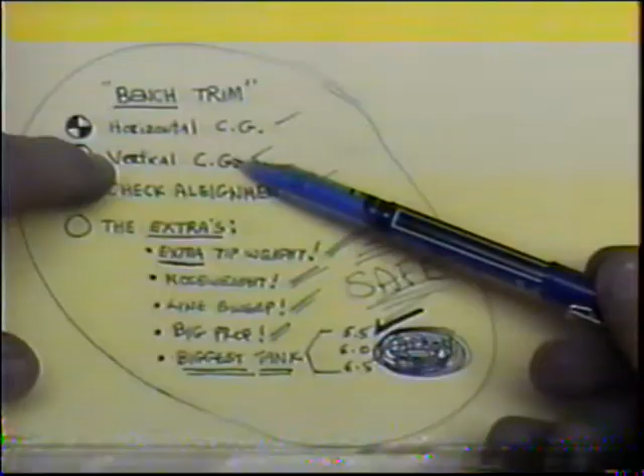Now, I've already done a preliminary vertical CG, and it looks like this plane will need a little bit lighter wheels. The wheel side is a tad heavy by about a quarter ounce or so.

And I have this laser alignment tool now. I've never used it, never even had it out of the box. I ordered it because I want to try this, because this is a take-apart plane, I can move things around and change things. And because I want to eventually put a carbon fiber wing in this plane, I want to be able to line everything back up.

But anyway, safe trim. You can do this all on a bench. And of course, this assumes once this is done, this is only step one. This involves something a little more, well, you can't really do it in the shop.

Now, in years gone by, I've done first flights on shorter lines, and basically the last 3 or 4 planes have all trimmed out with full 70 feet to the middle of the plane, the middle of the handle, solid 014 lines. I always have a set of 018 68-foot lines in case there's some pressing reason I'd want to fly in a pouring rain.

Well, to tell you the truth, over the years I've kind of abandoned that whole approach, and if it rains, I don't fly. And certainly this model, with the amount of hours I have in it, and what happened even at last year's Nats with the I-beam Spitfire, we got to the 3rd Walker flight, it was raining, and you lose your flight.

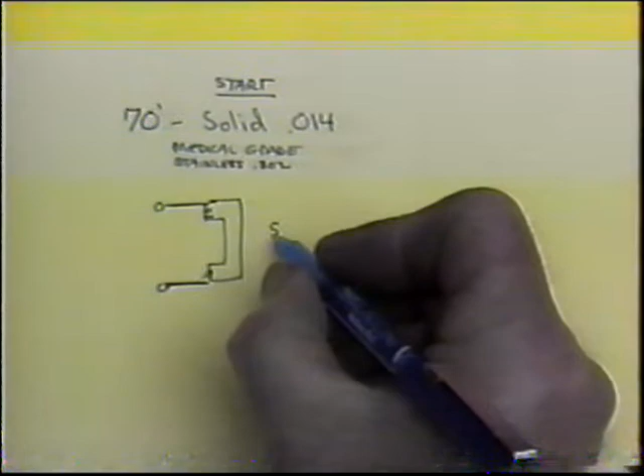And for a first flight, I would always start with the handle open as wide as it needs to be, as wide as possible. Give myself, again, this is for safety, because we know the plane is going to be nose heavy.

Now, as we take tail weight out, we can kind of come in, and see if the plane needs to turn asymmetrically or if it's symmetrical. Again, this is an infinite adjustment that might take hundreds of flights, but for the first flight, I'd like the handle opened up relatively wide.

Now, on the plans of any plane, should show you one of the most critical things, the CG. Now, the horizontal CG, 15% is about as nose heavy as anybody I know flies a plane, maybe with the exception of 1 or 2 people.

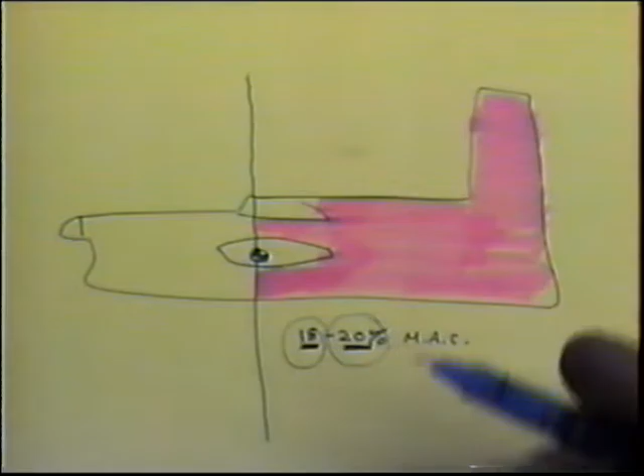And there are a few people I know, if you look at the plans of their plane, they'll show 22 or 25% rearward set CGs. Well, maybe for the super world champion flyers that's true, but most people are going to wind up in a 15 to 20% range, again, to start with, and then you need to feel it out.

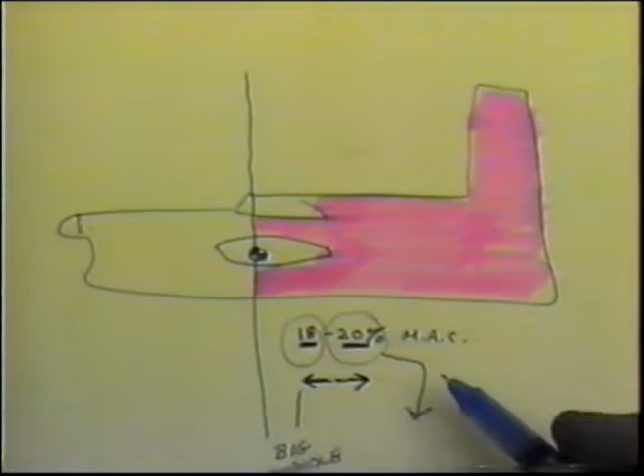Now, what happens if you have a 15% CG? You'll probably wind up with a big handle. If you have a 20% or rearward CG, or tail heavy, what's going to happen? You're going to want a small handle. Smaller.

Also, and this is good information, if you're flying a nose heavy plane, you'll probably want relatively short arms on your handle, or if you have a bar handle, you'll want the bar pulled way up against your knuckles. And I'll just exaggerate this: if you're flying a rearward CG plane, the arms can typically be longer.

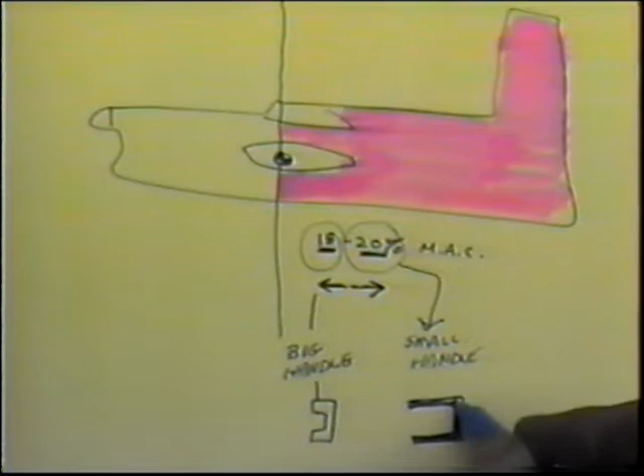So what you see here is an infinite amount of possibilities for trimming the airplane. But you need a place to start. So we'd like to start right in the middle.

And in this case, we're lucky because the plane didn't come out tremendously nose heavy or tremendously tail heavy. We don't need to resort to things, drilling holes in the motors or whatever, titanium wheels. But the horizontal part of the CG on this plane, good old 38, seemed to be real close. I think we're right at about 16 or 17%, and that's where we're going to put our first flights in.

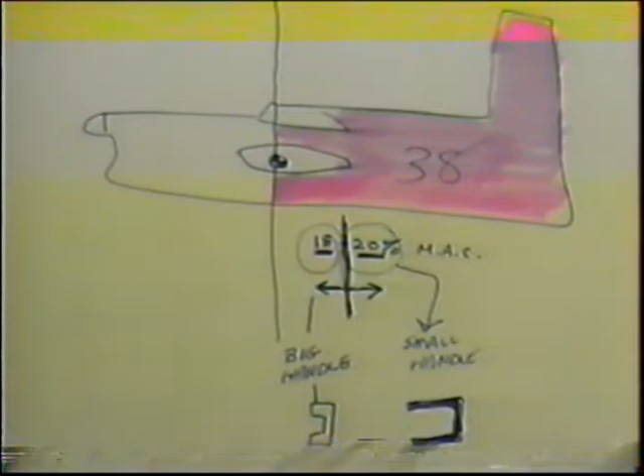Final thought here. This plane, as it sits now with the carbon body, is 55 ounces. Now, what happens as a plane gets heavier and heavier, and as you put more and more paint on it, you notice that a much larger percentage of the plane is behind the CG. So what happens is, as a plane gets heavier...

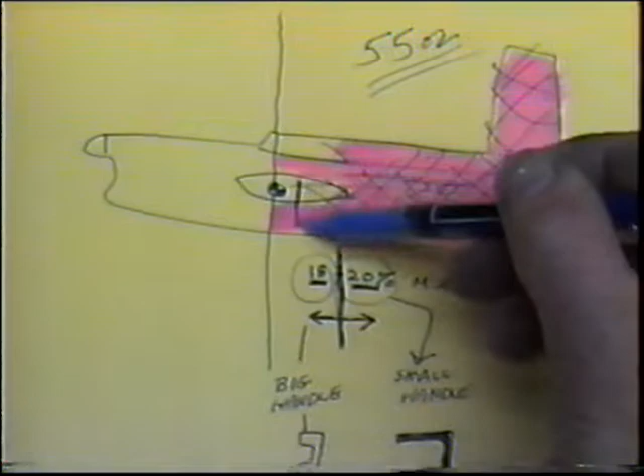I can guarantee you what would happen if this plane were 65 ounces, there would be a lot more chance the CG would be at 22%, or it would be further back, and then we'd be adding nose weight, and then we'd be in this cycle of, oh, now it's 70 ounces or whatever. So I'm kind of glad that it came out on the light side. I'm very glad that the CG wound up real close to where I wanted it to be, or where I had anticipated it should be, based on all the Cardinals and Stregas and Tsunamis that I've already flown.

Now, I did just a rough test on the vertical CG, and it looks like I have 2-inch wide wheels. It looks like what it'll probably need is a little bit smaller or lighter wheels to make it perfect, but it's certainly close. But here's the choices you have.

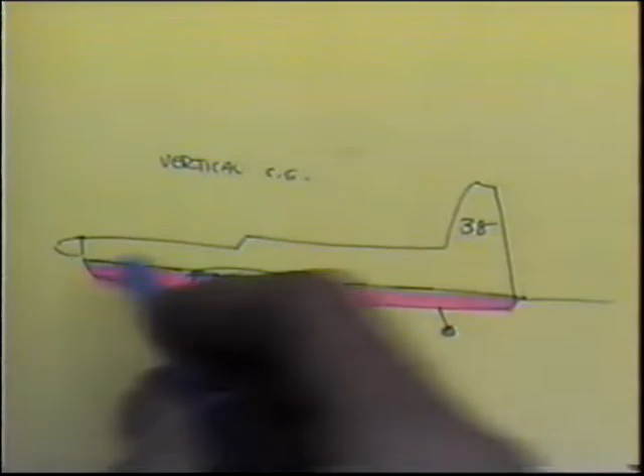If the plane doesn't work out right, exactly right, and of course that's up to how accurate you want it to be, a lot of choices you have is if you want to make the part that's light heavy. If in our case we wanted to keep these wheels, we'd probably need to add some nose weight or something up here, 1/4 of an ounce, or a heavier prop nut or something to get that to teeter-totter back.

Joe Adamuscko at one time added a fishing sinker to the tail of his Cardinal right up there to get the vertical CG in. And I feel, now some people don't feel, it's not a universal thing. Some people say, to hell with the vertical CG, just fly the plane.

Here's what happens if the vertical CG is wrong, and you live with it. Here's what typically happens in our case, let's just use our case as a thing. The wheels are a little bit heavy. So what's going to tend to happen is as this plane is flying, centrifugal force, which is a very considerable force, is going to tend to do that.

And what's going to wind up happening is I'm going to have to answer the phone. Hang on.

Back from President Nixonville. What I was trying to explain, because a lot of people miss this, they'll have a plane where the vertical CG is wrong, and because of the weight here, obviously what happens is centrifugal force at the extra weight tends to, in a very small way, maybe only 1/8 of an inch or 1/4 of an inch, but the plane will fly like that.

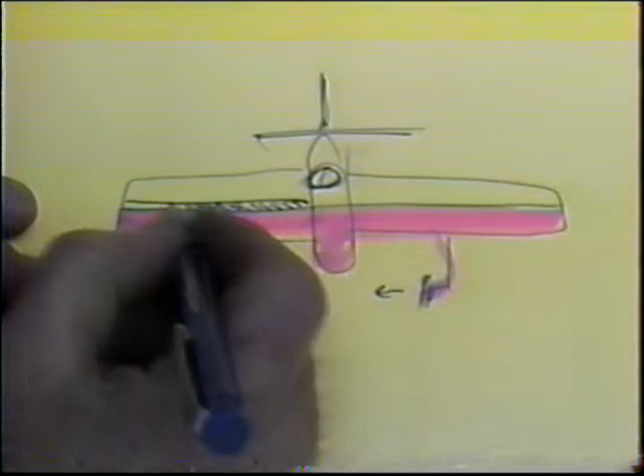So what they do then is put a flap tweak in. So now the outboard flap is up unnecessarily. The controls are not both in neutral at the same time. You've got like an asymmetrical control system just to correct what you can correct with the weight.

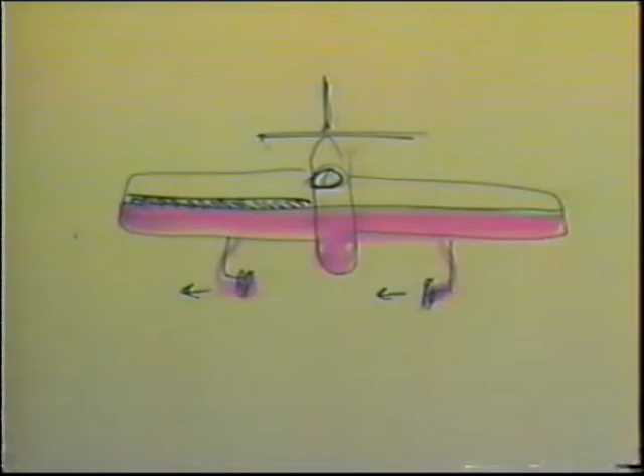So I'm kind of fussy about trying to get that part of it right before I go on to the next step. I want it to be nose heavy, tail heavy, but I don't want to start tweaking anything or adding tabs until I find out that I've got that part of it, that it's flying straight on the end of the lines. And I'm more fussy than most people are.

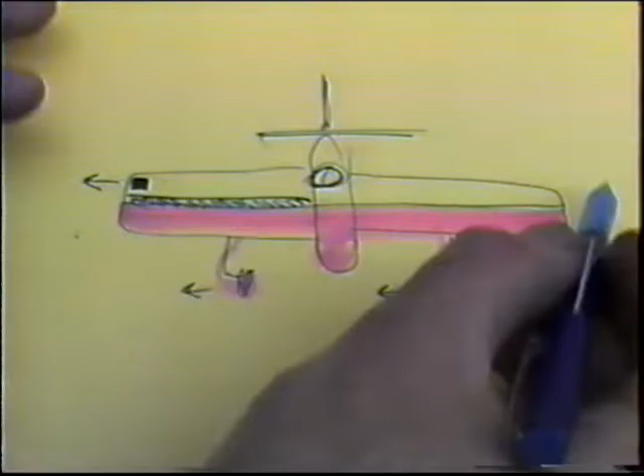One final thought too, another way of dealing with an unequal vertical CG is I've tried things like this, like moving the tip weight up in the wing tip, hollowing out the whole tip and putting a tip weight up there so that kind of counteracts it. There's a million other little tricks, but basically this is something you can do at the bench trimming phases.

Try to get it right through the center of the wing, and the way that I'm real comfortable doing that is, it's called the Plumb Bob method. You need to have perfectly calm air, no air, and you hang the plane from a wire. And here's the fuselage of the plane. Hang it from the lead outs and let it hang perfectly straight.

And what you'll see is it'll be off. In my case, it's off just a little bit because the weight is too high. Now you could put some weight here, or you can make this weight less. And the way you check that it's straight is get a thing called a Plumb Bob, which is basically just a chalk string. You can use a weight on the end, any kind of weight, it doesn't even matter. And then you sight down the Plumb Bob until you see you have it right.

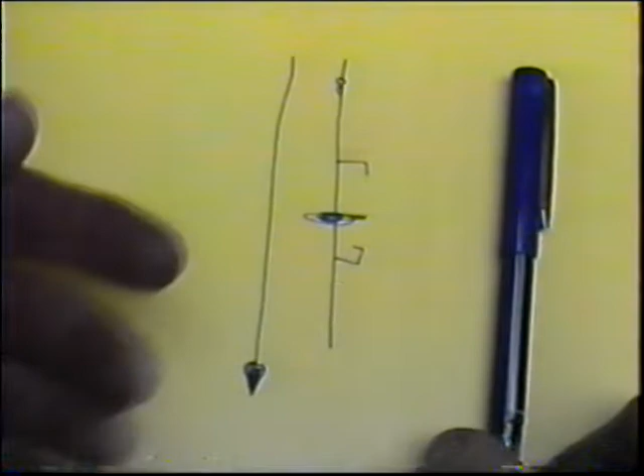It's relatively easy to do, but it's time consuming. That's why most people skip over that step, and then they wind up with unnecessary flap tweaks and things that are crazy.

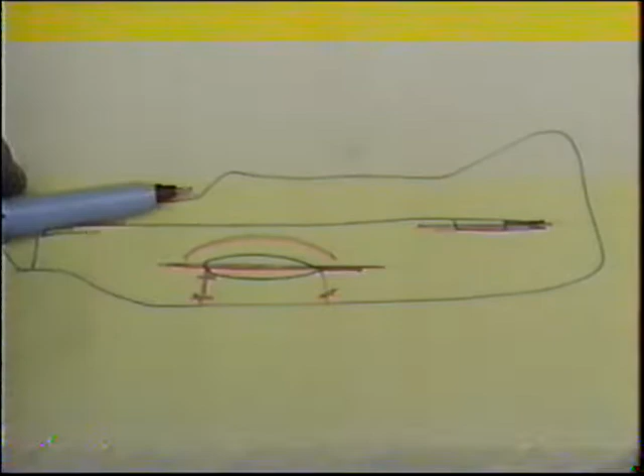Either later today or tomorrow we're going to check our laser alignment tool, but what we really want to do is ensure that this one is very difficult or impossible to adjust, because these formers on my take-apart system, that's pretty much what everybody else does. This is kind of my permanent datum that I can't really change. But I can always take the engine and slide a razor blade in on one side or the other, if I really had to, if that was out.

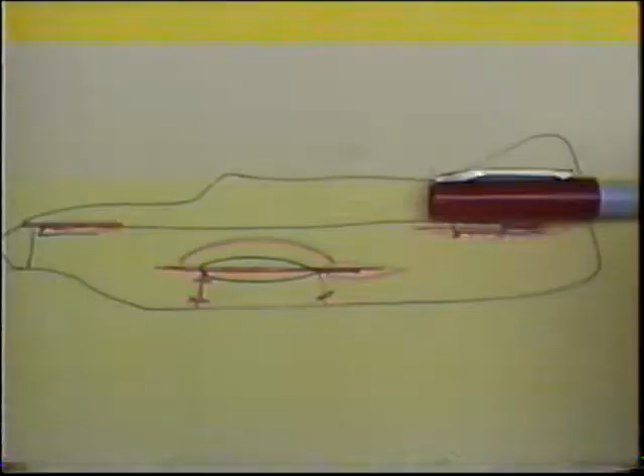And the tail, of course, because it goes in with compression bolts, I can always put a little shim in the front, a shim in the back, if it turns out the tail is off one way or the other. But most likely, the scenario that really almost everybody benefits from is if a plane doesn't turn equally, to make sure the flaps and elevators are both in neutral at exactly the same time. A lot of time you'll notice this will just be down 1 degree, this will be up 1 degree. Being able to adjust that push rod length so everything is in neutral at the same time.

And once all of these little things are taken care of, we're ready to fly the plane.

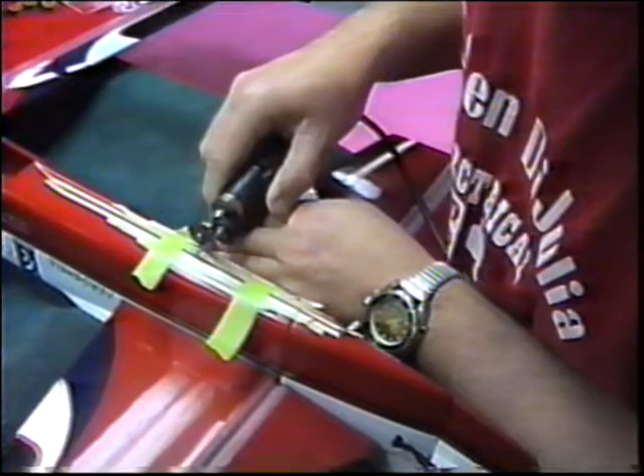At least the carbon fiber does cut relatively clean. Now notice you always take a climbing cut. I call it a climbing cut, I'm going from my right to my left. If you're trying to go this way, the tool catches and it just knocks you right off the part. All right, now what I'm going to do is take the tape off, clean that up, and see how the doors are going to fit in that slot.

Oops, show you how to knock the camera over. Let me show you a neat little trick.

When you cut a slotted part to fit in, one of the best tricks is to cut the slot a little bit shorter than you need to, then cut back the edges. If you make the slot longer than it has to be, look at my finger, you'll see the end of the slot. This is an old trick from laying tile. You always cut this edge back, cut the corner off, and that piece at the corner tends to lay on top so you don't see the slot.

Looks like we've got it because we're lucky today. So I just need to cut that back just a slight bit - that little bit will disguise the end of the joint.

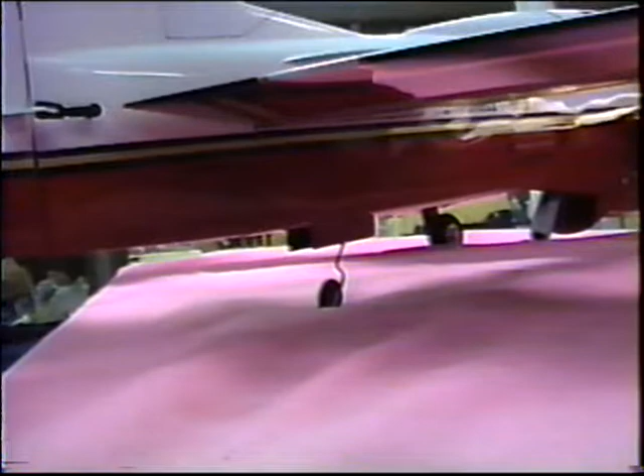We're waiting out the time to do a final trim on this. I set up my little bench to do some calculations and realized this plane is relatively nose heavy, which is the best of all worlds. I wanted to see how much solder it would take. Obviously I want it at 15%, and I don't want to fly it if it's more than 15% nose heavy. So I have that figured out, and that was the first step.

The other thing I wanted to do is I have a lighter spinner. These are the Russian ones they don't make anymore. Some of the hardware I've been fitting up here - I fit the other engine in to make sure everything lines up, because there's two different needle valve holes and things like that, and the headers may be a little bit different every once in a while. I made up a spare pipe, and the outlet on this looks real cool. I don't know if we're going to keep this as a spare or use it as the primary pipe, but it exits right out over the back. You can see what that'll look like when the bottom is on.

Also, in the course of fooling around with this and waxing it, I realized a couple of little things that I really want to upgrade before we actually go out to the flying field.

If I had not checked and seen how nose heavy this was, it'd be a very disappointing first day. You get down to Middlesex, everybody's down there, and what happens is you lose a day. Flying days are so few and far between that I don't want to lose any of them. But at least the best of all worlds is if you don't need any weight. It looks like we're going to have a little bit of a nose heavy condition.

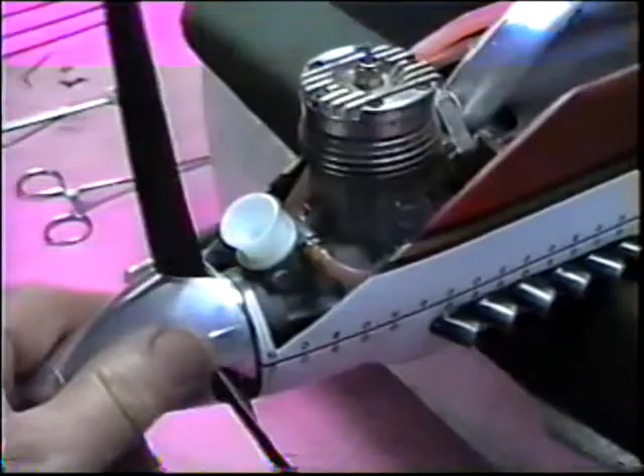Now the choices are I can try to make up an even lighter spinner than this. This is considerably lighter than an aero spinner. Again, they don't make them anymore, as is always the case.

What I plan to do is pick up some fresh clay - my clay looks like it's 1,000 years old. When we actually do get to fly the plane, I'll know I need this much solder to get it balanced. But I can adjust the solder when I'm done, or fine-tuning it, or if I want it to corner harder or whatever.

When I have it exactly the way I want it, the choices are obvious. I don't even have to make one - I have a brass tail wheel. Depending on the vertical CG, I can pack the tail cone with clay and just leave it there. I can weigh out this much clay and push it in with a little stick. What's nice about the clay is if some of it comes loose, it won't clog up the controls. A piece of lead would be a problem - it would clog up the control or possibly be a problem.

But anyway, as we go down the final home stretch here, I already gave up on the tape - it doesn't stick worth even 10 minutes. But I just wanted to have it in inventory. I wanted to see possibly if it did work. You never really know.

Anyway, knowing that it's real nose heavy is a big relief, because it's a lot easier in my feeling. If it's nose heavy, the things you have to do are all real positive - lighten up the spinner, lighten up any other hardware, and I still don't have the tank from Joe Adamuscko, the real fuel tank that's going to go in there. Those things seem easy to deal with. When you have a plane that's real tail heavy and you start loading up 2 ounces of weight on the nose, or an ounce, its gyroscopic action is always a problem.

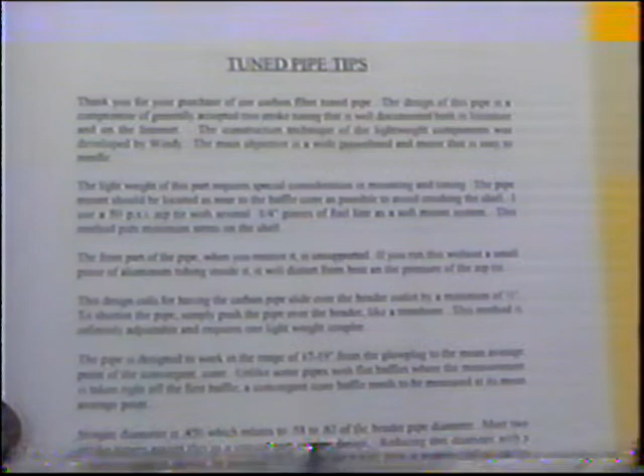If you're already one of the people that's bought one of my tuned pipes, you'll know I do a very vigorous testing program. I want to share with you the information I've learned over the years, going back to when we started making pipes in the late 80s with the help of Dave Midgley, who did a lot of the molding. At that time, he had an oven and I didn't. What I've learned since then, a lot of things have improved and gotten better, and I'd like to go through this quickly so you have an understanding of where our pipe program is going.

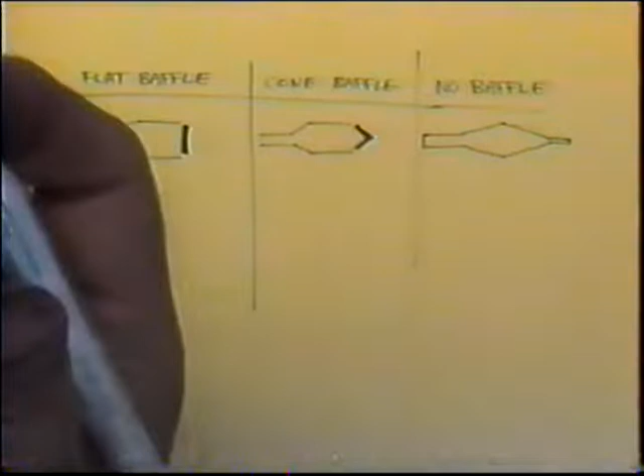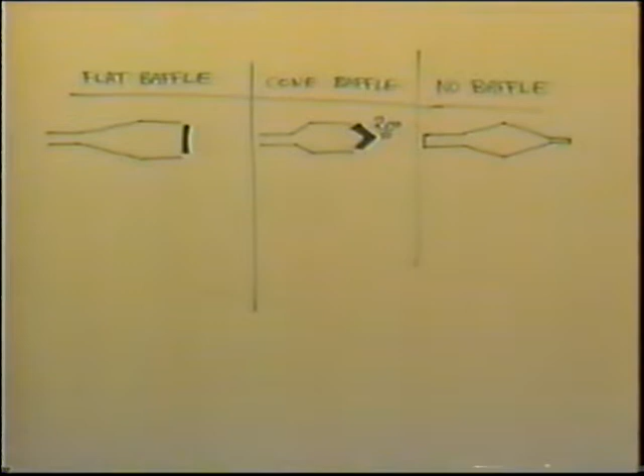We were able to get something like this, a much wider, friendlier needle range. Now, of course, a speed pipe or a no-baffle pipe are the other major ways they make pipes. A speed pipe would have a power peak like this.

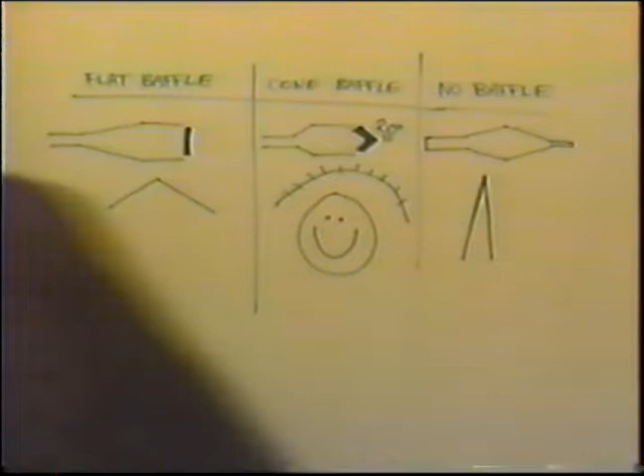One of the things we've done over the years, trying different angles and different things, is we've settled on the fact that we like a cone baffle pipe for the way we like to run motors. Please don't confuse this with a put-down of somebody else's system. A lot of people have been very successful with flat baffle pipes—it's the same way some people like Foxes and some people like OS Maxes. It's just a different way to run it.

I like to run my motors with the cone baffle because I seem to get a much more defined motor break. I've developed this over the years with several molds and Teflon molds into a system I want to use in Miss Ashley. This is my system, evolved over about a 15-year period, which seems to work well for me.

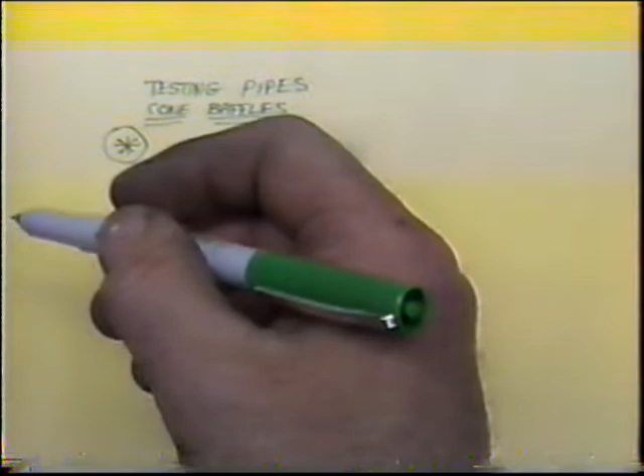There's obviously a lot of other systems. One is you can buy a motor and a pipe, basically a $500 or $600 investment, put it in a plane and go fly. I have a much different system. What I like to do when I get a motor—I've gotten excellent results with George's GMA Jet 60, obviously the PAs, the double stars, all the modern motors are good quality. It's not a comparison of motors, because you basically set up a motor the way you put on a shoe, how you like it. Some people like tremendous peak power, some people like a nice fat range, same as props. Some people want low pitch props where they run the motor hard, some people like 4 or 5 pitch where the motor runs softer and quieter.

But if you follow this, I think it will help out. One of the things when I start making up pipes—I'm going to start a production run in the next couple of days. Of that run, I want to make, at the same time, a couple of spare pipes for Miss Ashley so I can test them. I'll show you the little thing I want to try. I'm going to start by assuming all of the pipes are going to have cone baffles.

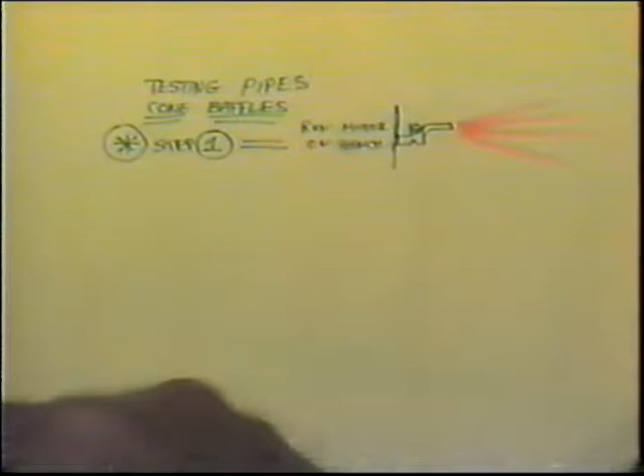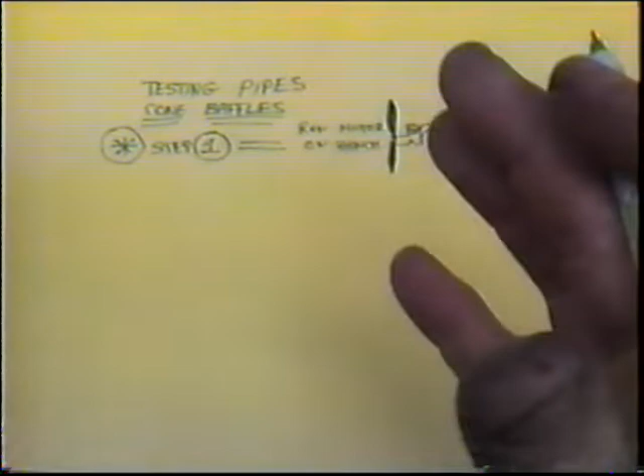One thing I'm going to do is put the motor and the header on the bench with no exhaust system, and I'll use the prop that I want to use in the plane. In this case it's George's 3-blade square one. The prop will stay constant for the whole test, and so will the fuel. Prop and fuel have to stay the same if you want a relatively valid test.

The first thing I do is record a reading for maximum RPM. This is a very crude way to do it, but it works every time. Let's say the crude reading here is 10,500 RPM, which is probably typical with a 3-blade carbon prop.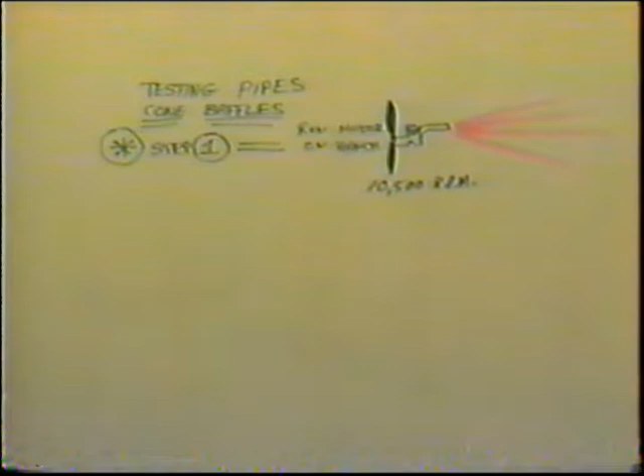Now the next step is I bolt on the exhaust system, and this part up here will be variable. I can insert little pieces in, and I'll start by running the pipe at 17 inches, 17 and a half, 18, 18 and a half, and 19. These are just typical numbers. For what I've found and the RPM I'm comfortable running, these five settings will give me a little power curve.

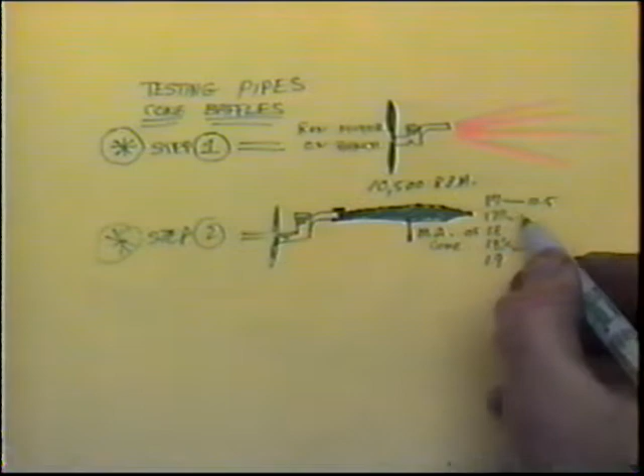Somewhere in here there'll be a spike. I'm just making numbers up, but typically right here you'll get 10.5, here 10.6, here 10.7, then 10.6, and 10.5. Just to make a little analogy: right here is the power spike, and right here is where maximum power is.

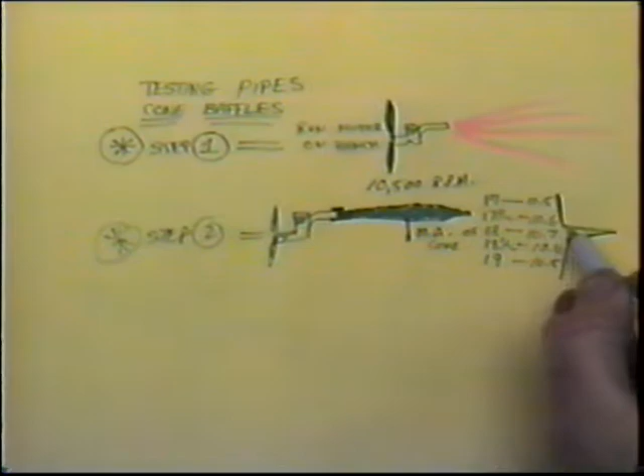So knowing that, I want to zero in on it, and remember we're measuring the mean average point of the cone baffle - you measure the mean average point, not all the way to the point. Typically, with the pipes I've made for other people and myself, 18 inches is a good starting point.

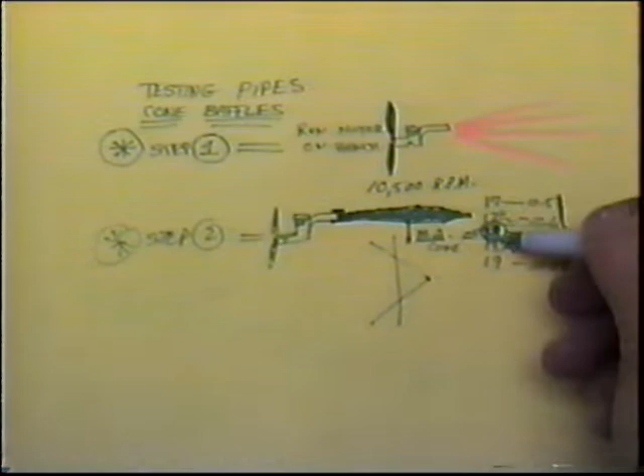A little shorter will give you more power. A little longer, if you can keep it running on the pipe, it'll run friendlier and friendlier, more like a typical 2/4 stroke run. Up here it starts getting more and more like a speed ship. But this is a good way I've found to establish this right on the bench, without even having the motor in the plane.

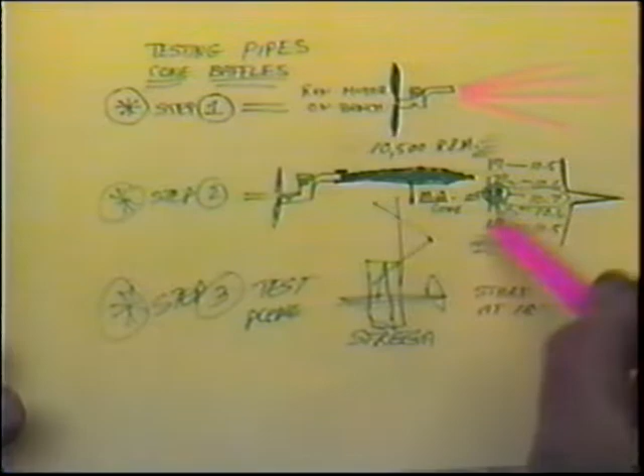The last part of this, before we're ready to go, is I'll take old Strega off the wall and put in the pipe that's already set where I think the power spike is. And remember, on hotter days the pipe tends to get longer, on cooler days it tends to get shorter. It's a sound wave in a high density volume - the cooler the air, the shorter the pipe; the warmer the air, the longer the pipe.

So if you're in Canada, obviously Ken Clapson's going to be running some short pipes. Guys in Brazil are going to be running long pipes. We wind up somewhere in the middle of that.

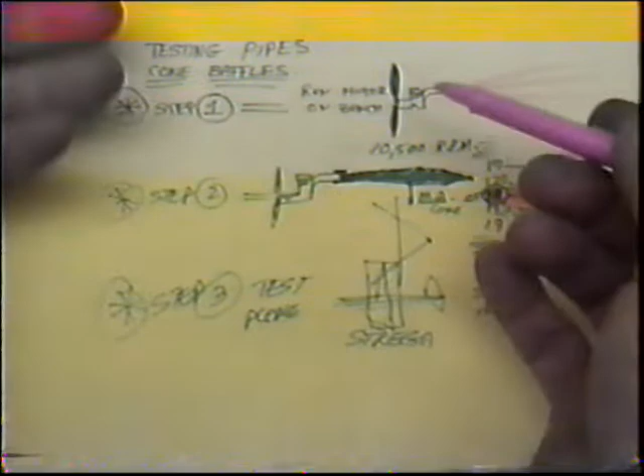But now you see what's happened is I've spent probably an hour, hour and a half, a gallon of fuel, and I don't even have the motor in the plane yet. Now it's going to go in a test plane - in this case, it's Strega, our old test bed plane. And what happens here is I want to see if I'm real close.

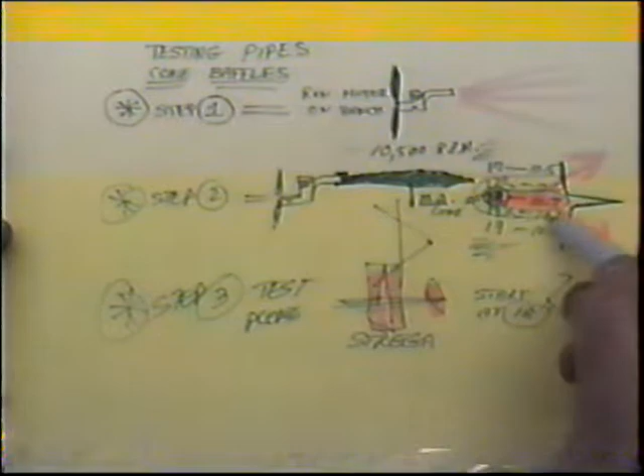So on the first flight, when I put a motor in for testing or a new pipe, I'll start at 18, move it out to 18 and a half, move it down to 17 and a half, because I know that's about where I'll be at maximum power. The power range I've found usable is about an inch. You get much longer than that power spike of an inch, and power really kind of drops off. Or on the other end, you've just turned your motor into a speed motor where it's only going to get on the pipe at 12,000 RPM or something crazy like that.

So by doing this, notice the thing that's significant here is we haven't even got the motor into a plane yet that we're going to be flying in competition with.

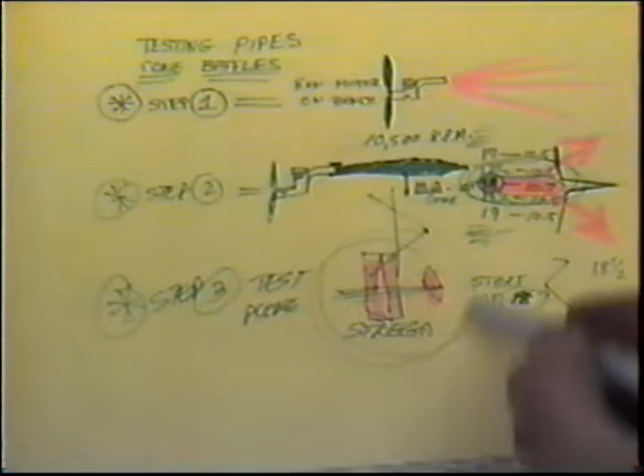In this case, when we're real happy with everything that's going to happen in Strega, we're going to try to get out this weekend with Strega and do motor testing, even in this rainy, crappy weather we've been having. The idea being when we take this, and this is step 4, and this is my plan. This works very well for me.

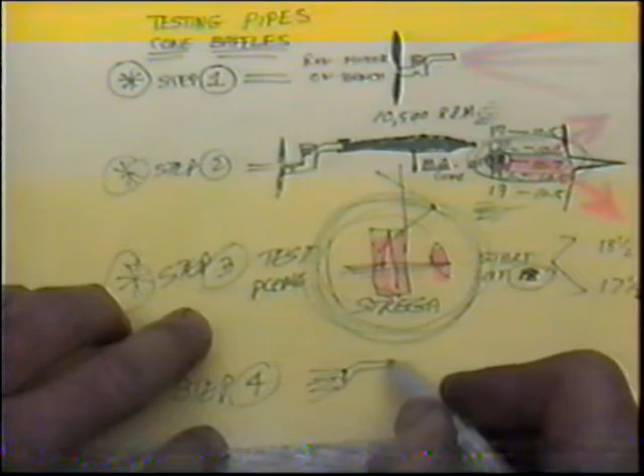Take that motor with the header all attached, the rubber coupler, the pipe set where I think it should be to whatever stinger set situation is, and the prop. That whole thing can just get bolted into the plane as one unit.

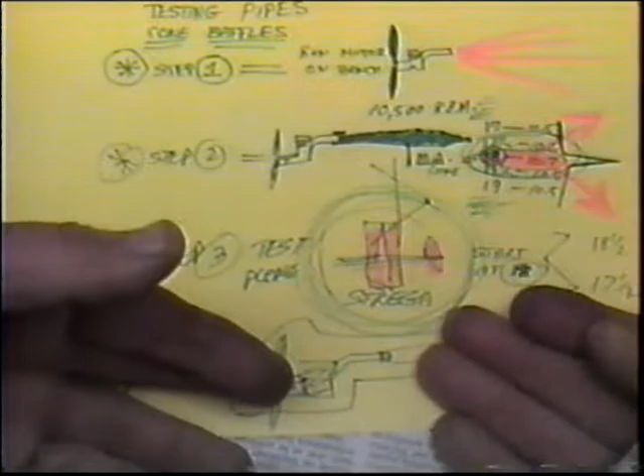What I hope to do is eventually have not only a pre-tested motor pipe where all the dirty work is done in a test plane, that I can bolt this whole assembly into Miss Ashley and be relatively close, so on that very critical first flight I don't wind up with crazy things, like couplers being loose or whatever. I really feel this 4-step program has worked very reliably for me, and you can use this to your advantage.

There's nothing here that you need to be a rocket scientist to do. And if you're just starting out with pipes, like I know many people are, this information I think will serve you well.

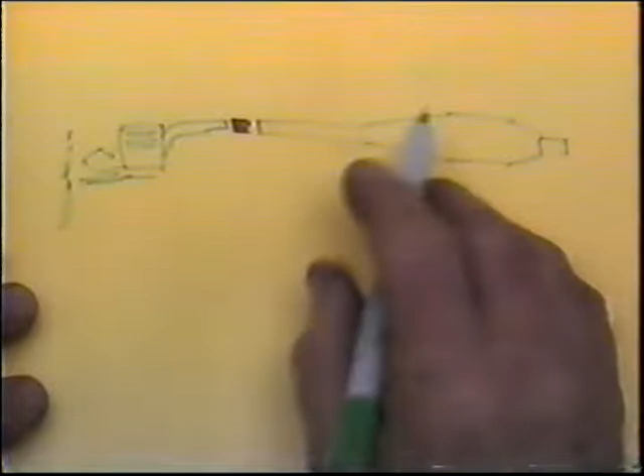One of the other things I wanted to do—over the years when I've tested pipes, I've wound up cutting them shorter than they have to be, and what you need then, of course, is 2 rubber couplers. The couplers weigh a lot. They add an element of uncertainty because you need more zip ties, and there's significantly more vibration.

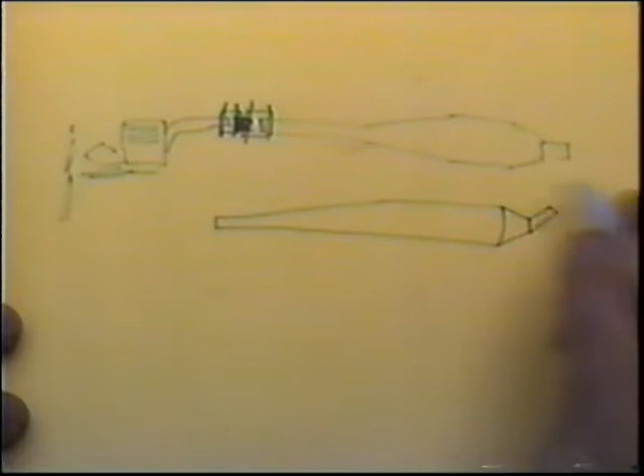So what I've tried to do now is come up with numbers, because I've done this so many times. I've come up with numbers that on the pipes that I make from the mandrels I use, I have a real good idea. I can use a cone baffle in the back, point the stinger up, and I'm going to go over this in a second to lay some information that I've learned on you.

What I do is make up one pipe where the baffle will be relatively at—let's just make a number up—at 18. Then I'll make another pipe where the baffle is a little bit closer in, maybe a half inch, and another pipe where it's out here. So one will be 18 and a half, let's say, one will be 17 and a half.

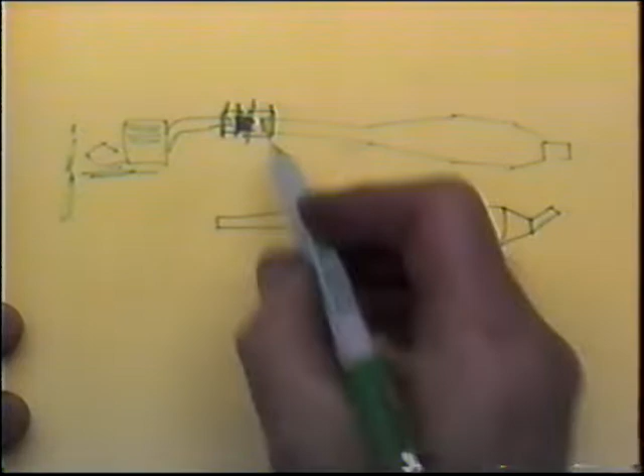Now what happens here is I don't need this—I can change the pipe itself as long as everything else is constant, and since these are made from molds, the pipes are not that much different. What happens is when I want to change the pipe length, I just change the whole pipe to a shorter or longer pipe, and I can make the pipe 2 different ways.

You can put the baffle—because this is a constant belly section for quite a while—I can move the baffle inside the pipe, and that keeps the stinger in the same spot. Or I can just shorten this piece, and remember, I would never get it shorter than where that aluminum tube is.

That aluminum tube—in other words, the 2 situations are some of the pipes that we've made that slide over the header like a trombone. What you have to be real careful of is that when you put the clamp on, the clamp is not here. The clamp is over aluminum at all times.

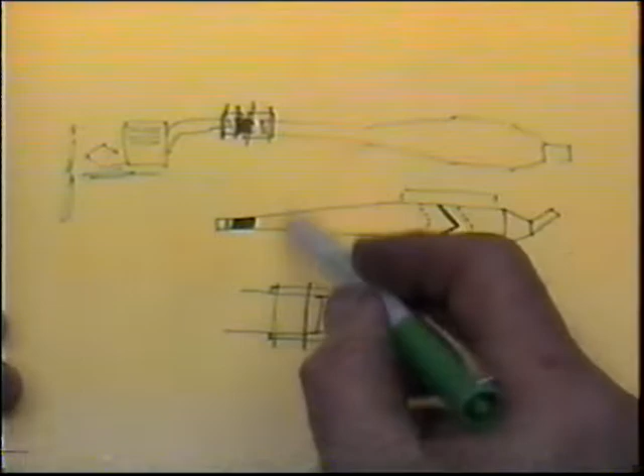Or that the little piece of aluminum stays in the pipe to keep the zip tie from compressing, because when the resin gets hot—and this is the hottest part of the pipe—you don't squeeze the pipe.

On a tuned pipe, there's 2 distinct things happening. There's a part of the pipe that sonically is going to reflect a wave, and it's this part of the pipe right up to the mean average point of the baffle, or in the case of a flat baffle, it would be at the face of the baffle. This is the part of the pipe that works, and everything that happens in here is doing something significant that you want to take advantage of, the pluses and minuses of having this tuning ability.

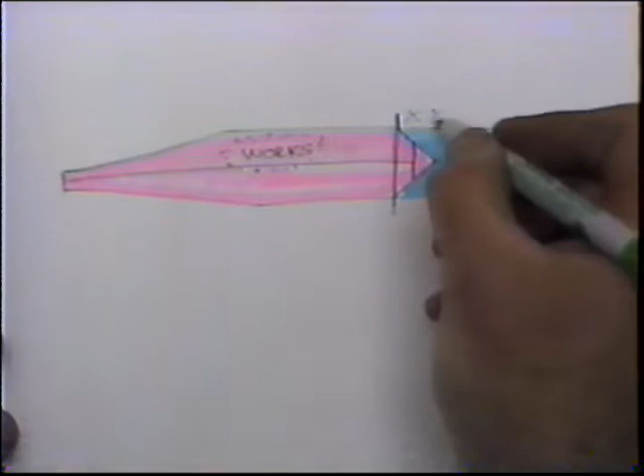Everything that happens back here, the muffling part of the pipe, relative to the front part, is insignificant. Back here, if you were to locate the stinger in the center, like a Brian Eather pipe is, which works fine, the thing I don't like about that is you wind up with this rubber, which to me, anytime I've tested them, seems to add an element of restriction, and unnecessary.

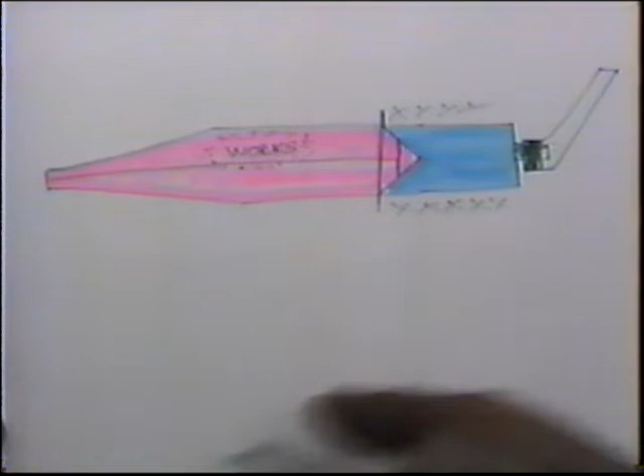It does quiet it down and it does keep oil off the plane, but I've found a better way for me, and I believe Billy Werwage's pipes now come this way, that the stinger is made out of carbon and it's built right into the pipe.

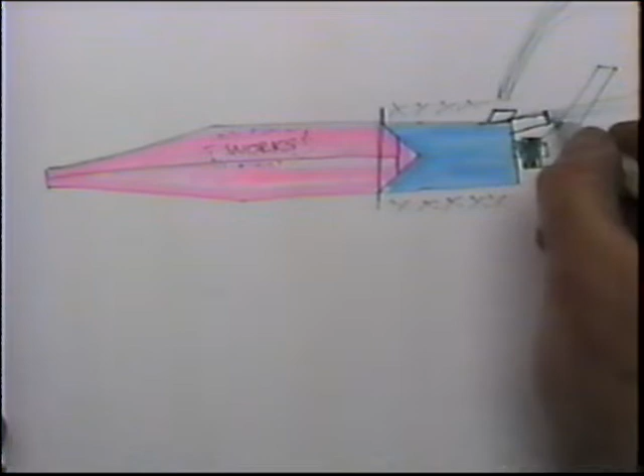Now, when it's put on a relatively flat angle like this, what I found is the smoke trail starts to look like a steam engine, and I don't like that look. So what I've done on the latest couple of pipes that I've made, I've put this on a very shallow angle, maybe a 5-degree angle, out the back, out the top, so that this is not acting like a rooster. Imagine a rooster tail. This is a significant negative thing.

When you're flying the plane and that oil stream is coming out, especially on inside squares, it always looks like the plane is putting a little wiggle in there. By having the stinger angle back - and remember, it's very easy to make these changes before you run a pipe and it's not oil soaked. It's not impossible after, but it's a lot better to decide where you want it, if you're going to order a custom pipe like the helicopter guys do, and they want that in a certain spot. Before you run the pipe, you want to put that exactly where you want it.

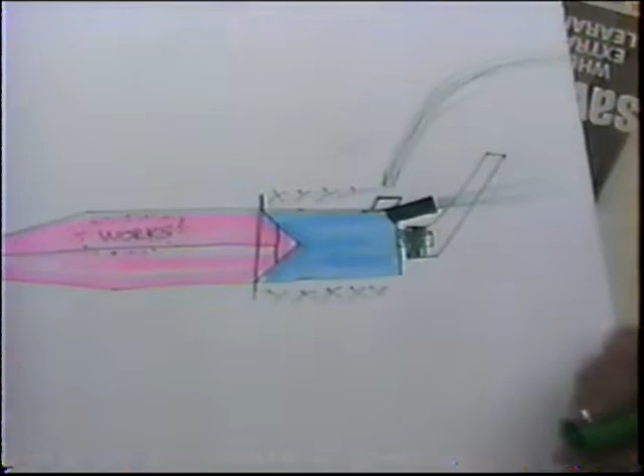And that's one of the things I'm going to be doing, is I'm going to be making, in the next couple of days, some spare pipes.

Another part of pipe technology: one pipe is useless. If it seems like any of these pipe-related things, when you only have one, you're on a hair trigger. I've seen pipes that have developed leaks, pinholes, cracks, physically broken. Up here they melt from lean runs typically. Hose clamps that distort the whole thing because they're put on incorrectly.

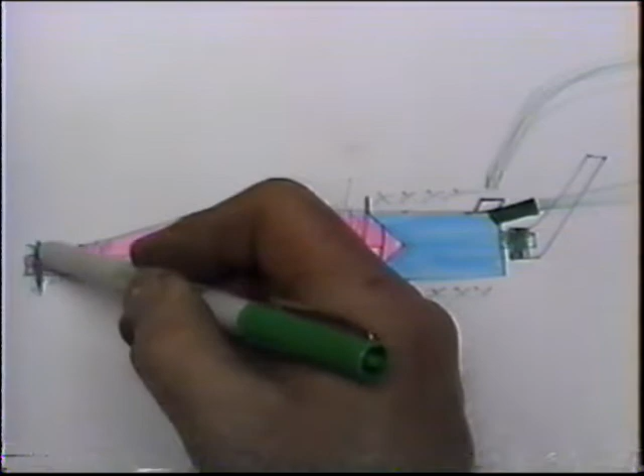A tune pipe is something like a tire on a car. You really should have at least one spare, and I'd be comfortable if I had a lot more than one spare in the case of Miss Ashley.

Not everybody wants to make their own tune pipes, and I just thought I'd put a minute or two of how we actually go about making them. They're made - this is a solid TFE Teflon mandrel. It has a very slight curve in it so it can go over the curve of the wing. It's solid Teflon, so you need no release agent.

Now what happens is, you take a carbon fiber sock, basically coat this with resin. It's high temperature resin, special resin. And this gets laid up, and we create, from this, we create the shell of the tune pipe. That's step one, and that takes one cycle to get the shell.

Now once that cures, that gets removed from the mandrel, and you can see we have a very light, extremely light, feather light shell. But because it's relatively thin and compressed, there's a good chance that somewhere in here there's - in fact, see the little pinholes in there? So this does need another coat of resin.

Now the way I make these, I sand this whole thing down with 80 grit. You can't just put resin on top of cured resin. It has to be like this before you put the second coat on. And that you can do in a lathe, or you can just sit and sand it by hand. What I found works real well is to wet sand it. Never dry sand carbon unless you're using a mask.

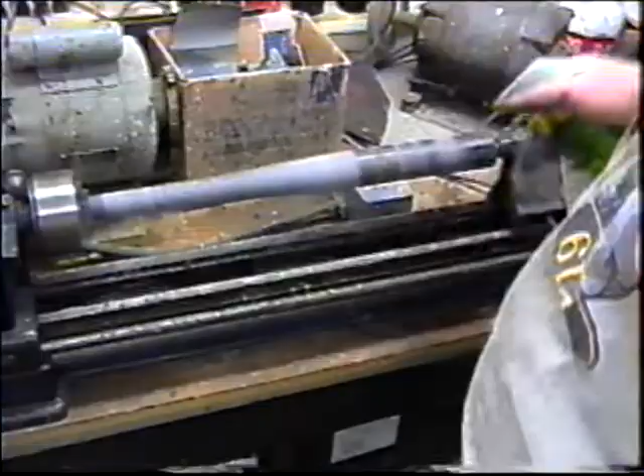Anyway, I found that by doing it this way, it's a lot of extra work as opposed to a lot of people that make pipes who prefer to just put the resin on all at once and just let it look like an alligator's rear end.

Well, part of the thing I like about these is everybody that looks at them first notices that they're lighter. You don't have to be a rocket scientist to figure out all those pebbles are just adding weight. This is time consuming, a little tough on your hands, a little tough on the wall.

At the end of polishing a bunch of these up, I have about a 20-minute cleanup operation. Now what I do, as soon as I'm done with that step, I go down to the sanding sponge, the next softer grit. This starts to really cook it, you can actually smell it burning in. If you don't roughen it up between coats, chunks of it start chunking out. There we go, now we're starting to burn it in.

But anyway, at least by seeing this, you have some appreciation of what goes into a tuned pipe. No matter who makes it, it's always a high labor item. It's not the kind of thing that's extremely easy to make. Like a motor, there's a lot of hand labor involved.

There comes the polish now. You can see the smoke. These pipes get so hot that when you're doing this operation, my hand is starting—look at it, you can see this starting to smoke too.

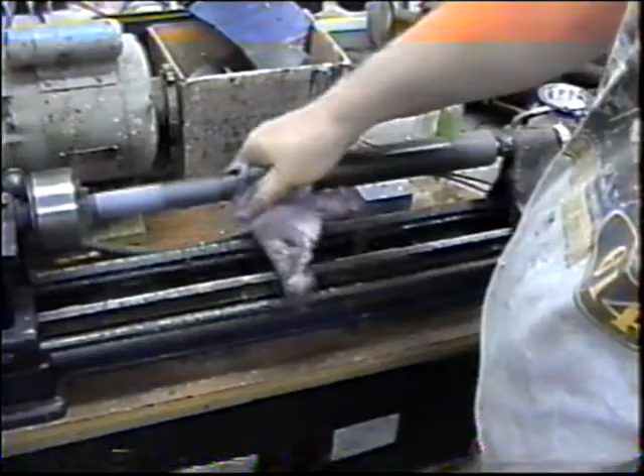And the last thing is, of course, the gorums, and you can see how quickly the gorums brings it up. Now, I went and bought, like a fool, this $30 tub of fiberglass polish. You know what? It doesn't work as good as gorums. Nothing works as good as gorums.

And when a customer gets a pipe, it doesn't matter—I just like it to look like it's a part of the B-2 bomber, or part of Tsunami or something. You can see how that polish turns out.

Now you see this doesn't ride in the chuck because this pipe purposely has a little bend here so it can go around the wing. If you use an aluminum mandrel, that's almost impossible to duplicate. But so far we've had real good luck with these—I haven't had any of them come back.

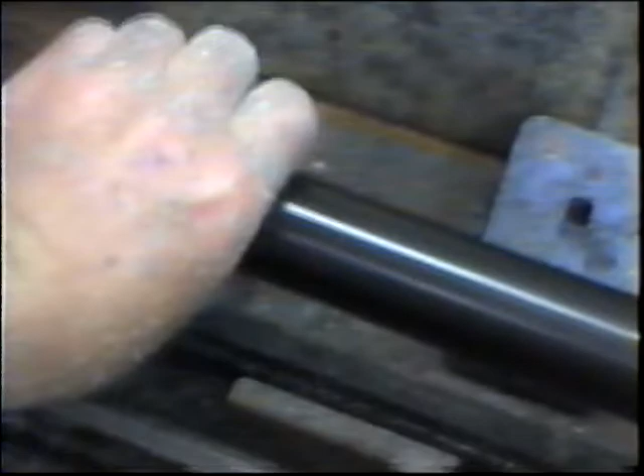On today's mail, we've got some nice stuff here. This came from Joe Adamusco, and you can see he made it to the specs I sent him, because I wanted that tank angled in the plane—that was one of my motives. This is just a little bit different, like a nobler tank. I know George had good luck with these tanks with Fox 35s. I haven't had one in a long time, but Joe makes them this way all the time.

This has a baffle in it with 8 3/32, 1/8 inch holes. He's got the vents in a little bit different position. Now what I want to do, because I have the plane all apart in pieces, I want to check that this is going to be reasonable to change at the field.

Because what I want to have, obviously, is choices. I want to get Wayne to make me up, if possible, a carbon fiber tank. But in the meantime, I want to have a normal replacement, ordinary 1-inch tank. This kind of special tank is 6.5 ounces, in case I want to test higher nitro contents or more compression. Needless to say, I want to have choices—that's the whole thing here. And that's a real work of art, by the way.

Just look at some of the workmanship on this, this is Joe Adamusco's handwork, the seaming. Absolutely beautiful. Joe, I thank you very much.

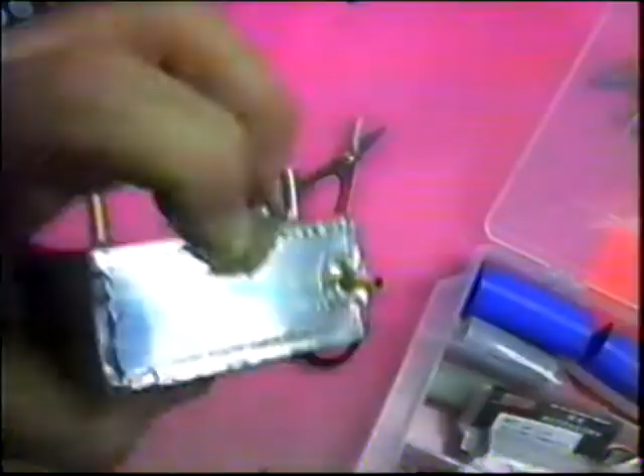The only really realistic way I know of to do this is to bend all the tabs down and solder one side first. I don't know whether this is going to be good information. You really never get all of the tabs down in the same, at least I don't.

I'll solder this first side first, even just tack it, because once this is in place, then I can come back and do the other side.

A lot of times with a tuned pipe plane, you want to wind up with a bigger tank, and that header always seems to be in the way.

First piece just tacked in. Now I can get these corners relatively nice. And then most of all, I'll go check it in the plane.

I've done this before where I forgot to take into account the header size. Really isn't good for your ego.

Now if that fits the way I want it to, then I can run the seam.

Even that's a little too close for comfort because this is real hot, so I'm going to take that out, make another piece, open this up just a little bit more. This is why I have to, and of course it doesn't take into account when you shim the tank up, it runs into the header even more. So good thing I got this done before we get to the field and this header melts the gas tank.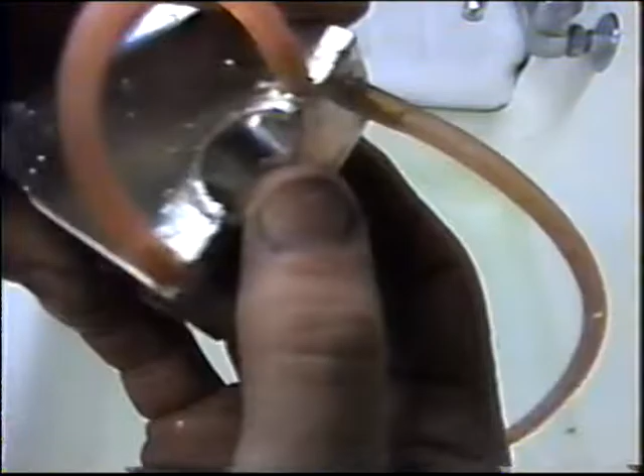Beautiful soldering job, and I mean, I think Warren Walker would even be impressed with that. Believe me, that's not as easy to do as... why am I saying that?

Anyway, what I want to do is check for any air bubbles. A lot of times when you touch a soldering iron to the tank, it'll leak someplace else.

That looks good. Probably for the first time in my life, it isn't leaking so bad. Anyway, I will clean this up.

Now the next step is I have to go get a gallon of alcohol, and I'll run a gallon of alcohol through this. The alcohol hopefully will get some of the stuff cleaned out. I have ordinary alcohol. And then I'll run some fuel through it and just watch the fuel coming out in a piece of clean paper to see if we've got it all clean, because boy, I do not want to have a first flight lean run off the end of the planet.

If there's one thing that really makes me crazy, and I know it happens to everybody, you have a plane, you wait for that first beautiful day of the year. What I want to do, before I go any further, this is my little technique. It usually works pretty well, but certainly for the first 100 flights we'll have a filter. Then after 100 flights I like to bypass the filter. But by then, you hope, if there's still stuff in the tank, you're dead.

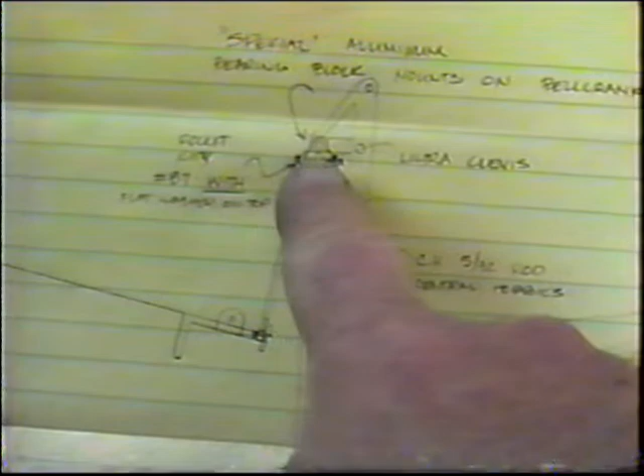Now in today's mail, this is from John Grigsby. He's responding to the thought I had about using 3 push rods, and you can see his diagram here. He had a great idea for a little clevis arm with a ball link on each end and a clevis in the middle. He made up the specifications for it. This is one of the things Gerald Champ was real concerned with when he was getting to the point in his Mustang that he had to come up with a solution for this problem.

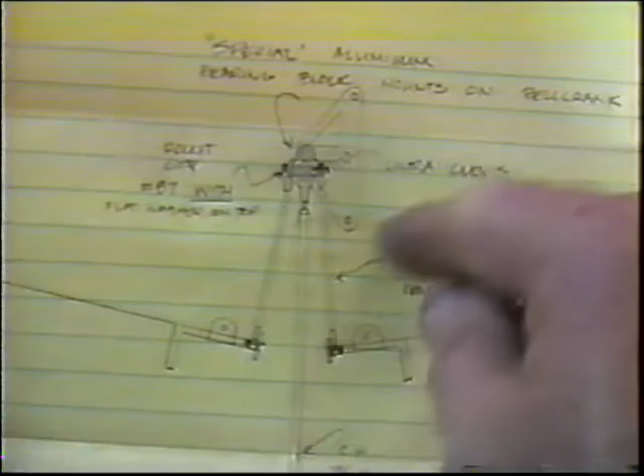And I'm not satisfied that I even have a solution. My idea was to use 3 bell cranks, but this certainly looks like it would be a doable solution too.

John sent these pictures of Jake Moon, and the caption he wrote for the photo is, "Windy, watch out, you're in big trouble. I have nicer knees than you." And his caption on this one is, "Windy, are you sure you have a tuned pipe that'll fit this plane?" What the heck. Oh, I don't know - the caption on this plane is it's too big for him to fly by himself. I don't know, he's going to get bigger. The plane won't get bigger, but he will.

Yeah, listen dummy, you want to figure out how to have dihedral in your wing? Don't worry Windy, we'll figure it out for you.

And the caption on this one is, "This is Steve Moon's B-25. This is his first one." Now imagine, he's built another one. Anyway, one of the things I always liked the idea of - maybe you could make a full-size Mitchell Stunner look like the ballerina in flight.

Steve Moon's X-35 at VSC. John, by the way, is successfully making those great carbon fiber wheel pants. Anybody wants a set of carbon fiber - now they're not fiberglass - wheel pants, contact John. He's in Texas.

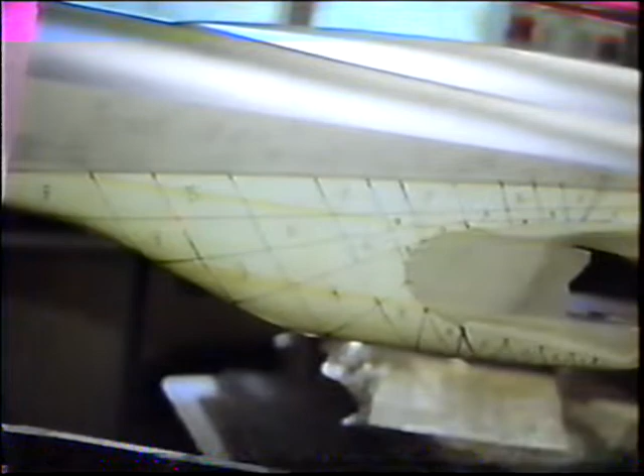Here he goes into the paint job. Look how he marked black, white, black, white. Come on, Paul, just do it. No, I can't tell by the pictures. Well, he's determined to make a voodoo paint job using Brodak purple. Oh, this looks cool as heck.

Anyway, this definitely will—definitely looking like voodoo here.

Now in today's mail, boy, this has got me really excited. I thought it was a milkshake, a chocolate milkshake. Now what it is, it's some expanding foam from Ed Gallagher. And I thought, well, what the hell am I going to use this for?

Well, I read his letter, of course, and he's got the whole deal on how to use it. Of course, he sends me samples. Good man. And I look at this and I'm saying, well, what the hell is he making a mold of here? A snow shovel or something?

Or, you know what it is—of course, Ed is into giant RC scale. It's a mold of half a wheel pant. I don't know what plane this is, but what he did, and this was just a test mold, he laid this up with polyester resin, and it has print-through and a flat spot on it and everything.

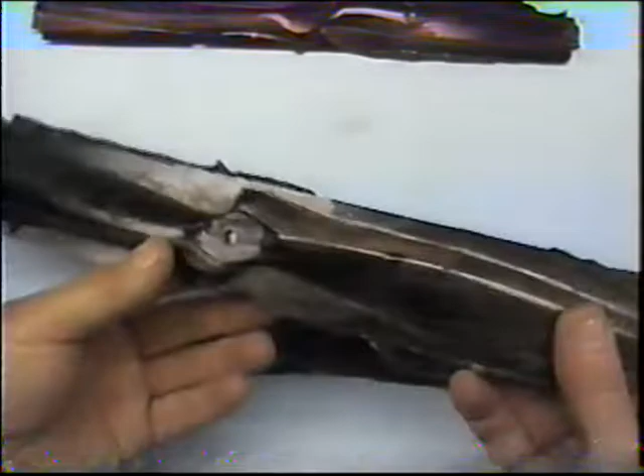Now these are 3 that he made up for me. Of course, they've got the flash on them. I'm going to have to hand finish them, but you don't really need to have a pretty prop at this point in time. I can put a hand finish on, and if I want to make one for appearance judging, I can make one. But he did a real nice job.

He's using a method called paper dolls, where they cut the carbon in strips to fit the mold. You can see how it laid out. Needless to say, all the carbon runs tip to tip. There's none going in the opposite direction, unlike some props.

Step 1 is to go over to the saw and cut off all the extra overage. The first step on any of the props you get from Dennis is removing the flashing, which he always leaves on. When you're purchasing a prop, you're paying a good part of the cost for the hand finishing, and I prefer to do it myself.

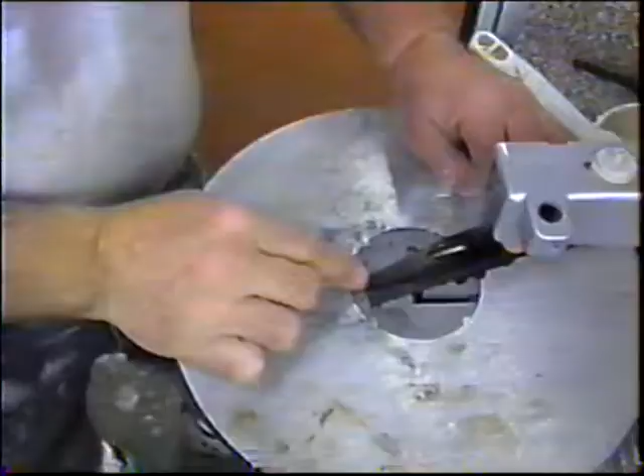Needless to say, anytime you're cutting carbon you want to wear a mask, unless you're shooting video. Cut it nice and slow, using a new, fine-tooth blade. And that roughly gets the prop into its outline shape.

Now from this point on - and believe me, don't ever take sandpaper in your bare hand, you'll get a splinter - a real handy tool is the Bud McKnight sanding stick nail file.

The first thing I want to do is radius the edges just a bit. Now see, here's where I missed with the saw - I can make that correction. What you can do is make yourself a little paper template of the blade shape, so you can verify you're getting both blades exactly the same, especially if the mold is worn like this one is.

Now what I want to do is dress it off - Dennis has already fixed any little imperfections that are in here. I want to get the whole prop dull. You can see how quick that comes out.

Now even though we'll start flying this plane with a 3-blade, we want to have the 2-blade ready in case it's so nose heavy that we need to get that extra half or three-quarters of an ounce off.

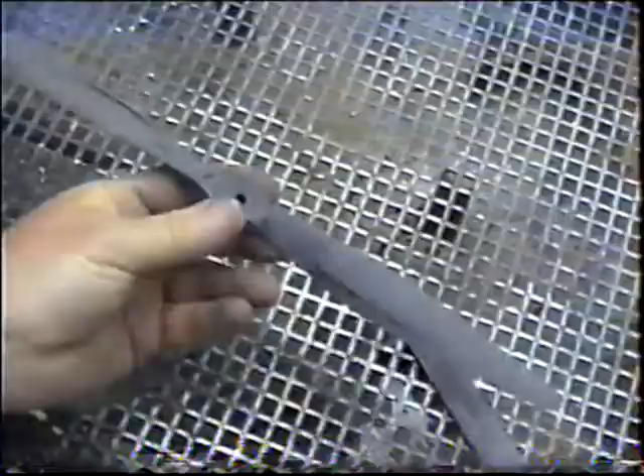Now this one is real close. It's more than 13 inches of diameter, so I know I can't do that. Alright, Dennis, you are okay.

I always like to start with whatever pitch the prop is molded in as the first step, and then see if I need less pitch or more pitch.

Sanding I like to do with wet and dry sandpaper, wet, for two reasons, and I never put my finger up there. I just let the sandpaper do the work. I'm just using that as a tool, because I'm real conscious of getting splinters under my fingernails. You can see how quick the material comes off.

Another trick here is if you want to maintain that good balance, do 100 swipes on each blade, or you can just go rebalance the prop. But it doesn't take long.

Next step is to take some 600 grit, and what I like to do is put a little bit of soap on it even. This is a good way to avoid getting splinters. Always have the sandpaper crease facing your finger. Now when I do that side, I'm actually sanding, just putting a smooth finish on, and I'm keeping a radius on that.

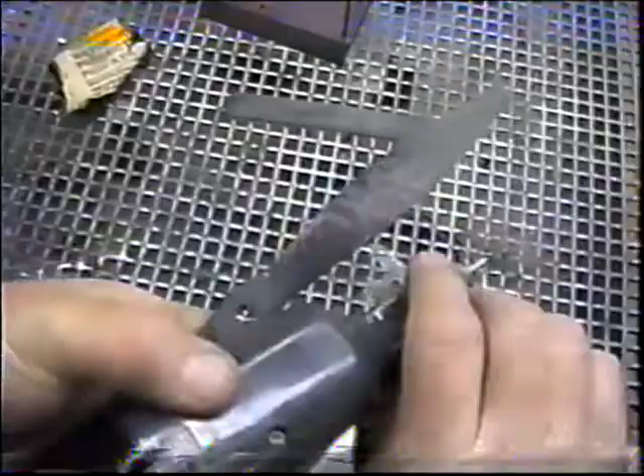And anytime you sand carbon fiber wet, you don't have to breathe the dust. I'm satisfied with the finish, and I just need it to be rough because we're going to work on these props.

This is a thing I've found real handy, is plug in the tool, always works better that way. I want to serrate all the surfaces that are going to touch, either the spinner or the motor crankshaft.

What I do is I put my own number on each one so I know which is which. In this case I'll have three that are roughly the same, but I'll have a number on each one.

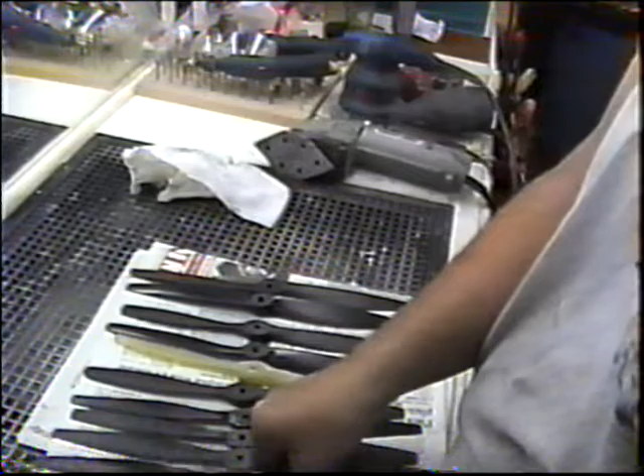So we have all the props, and this is what I do, when it's time to put them in the toolbox, keep them in some kind of storage so they don't get chewed up. They're all balanced. Sounds like Mike just fell off the ladder out there. Boy, if you only knew what a hassle it was putting this roof on the house.

So we have a lot of Dennis's props, and I have a lot of faith in them because I've used them for the last couple of years. Used them on a Spitfire at the Nats, an excellent choice. And then what I do is I take a rubber band on this, it's a good way to store them. They don't get dinged up as bad as if you just leave them.

And that should get us flying. We have 2 blades, 3 blades, no blades, broken rubber bands.

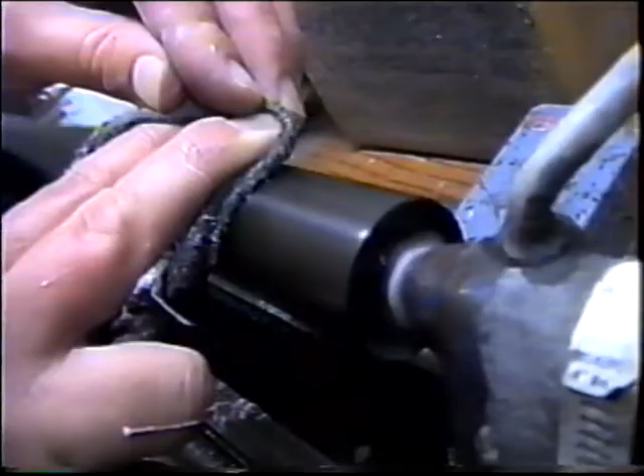Yeah, it looks real nice, good job. I'm wearing some nice designer clothes today. Yes, yes, you've got your Viva la El Bandito shirt on. Yeah, that looks good.

So you'll have the nicest looking pipe in England, I hope. Some lucky person in England is going to be flying this pipe before the two weeks are out.

This is the custom stinger that Rich Jacobone needed to put in his P-51. He needed to have the stinger come out in a very precise location in the back of the scoop. This is a special one we made up for him, finished this up today, this is the one that's going in.

Joe Adamusco's stuntress needed a stinger location and an angle that was unique. We finished that one up today while we have Elliot here. It's so nice having a slave to do all the polishing, I love that. I've got to keep him chained to the lathe over there.

This beauty's going to Ken Clapson for his new plane. Ken, we put a lot of work into making this back end. I had to make a special back end for this pipe to meet up to your drawing. I hope this is going to work for you.

You ready to assemble? I just love having him do all the work. You know what, being in the pipe business is great as long as you don't have to do the work. I like doing everything but the work.

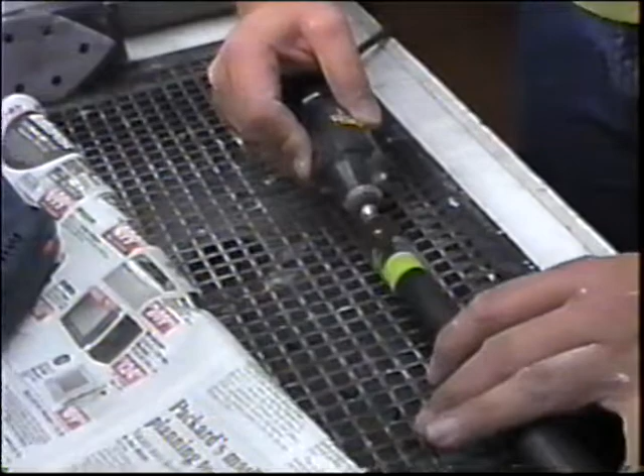Putting the knurls on the front of the pipes that are going to England. Without those knurls, you run the risk that the pipe could slide off the plane and maybe even hurt somebody. El Bandito, the El Bandito of tuned pipes here.

As the last project, while we have our plans man available, Elliot has done all the plans for the Strega kit that's soon to be coming out. Through the construction of Miss Ashley, I made all these templates of all the actual parts, even the lettering, so that the person who buys the plans gets the crutch, the tail - I even made an extra tailpiece - all of the airfoils, all of the shapes, the gear wire, everything that's going to be on the plans, and the plans will be available. Tell us when.

In about a month. Well, it'll be up on a website when they're ready, beginning of June. Take care of Strega first, I don't want to hold Brodak up.

We've got the real templates of the rudder and everything that we've used to make this kit. And if there's any inaccuracies in the kit, what's your home phone number, Elliot? Thank you.